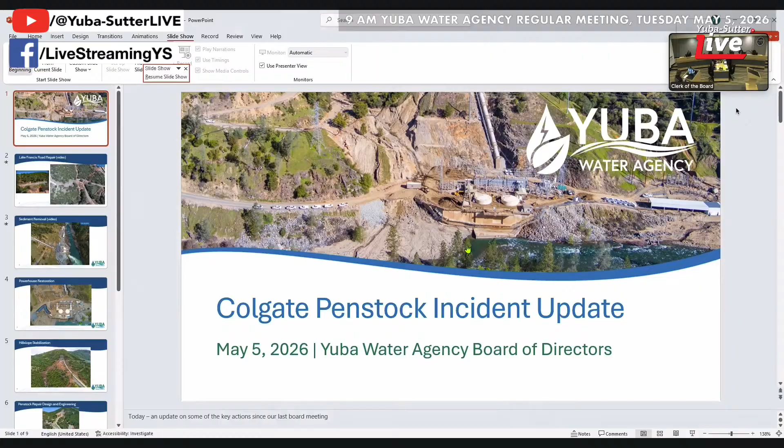My name is Kian Summers. I'm the Director of Power Systems. With me today is Justin Hoffman. Justin's our engineering manager. We're going to give you kind of a tag team update on the situation and the progress we've been making out in the field, and are happy to answer any questions you may have. So with that. Great. Thanks, Kian.

So the first one is the Lake Francis Road repair. This was the first project, as you can imagine, that we started with. We need to get access down to Colgate. So with the incident, we had two kind of rivers that came down the mountain, one on the east, one on the west. The Lake Francis Road was impacted by the west one.

So here you can see the first one. It should be playing the video. Question mark, Mandy? Yeah.

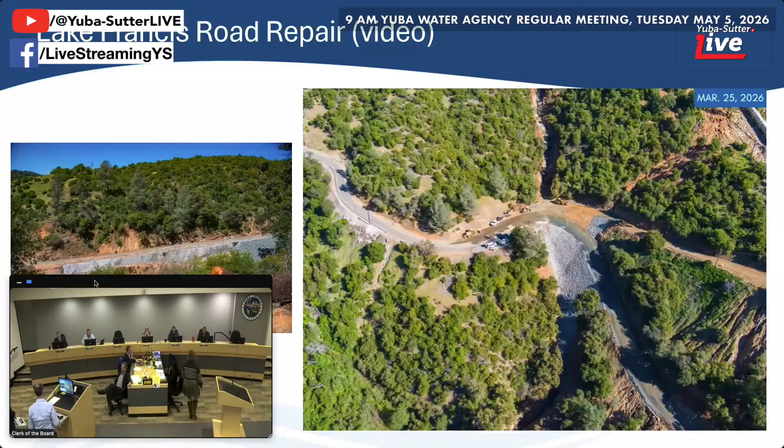So this is a video of progress over time. The first thing, like I mentioned, was to get access down to Colgate. There were two areas or slides that we did rock buttressing on. That got us down to the powerhouse within roughly a week. And from there, we started adding more robust rock buttresses. This is slide 1 here that you can see. So that's been going well. Access continues to improve over time for us to get down there.

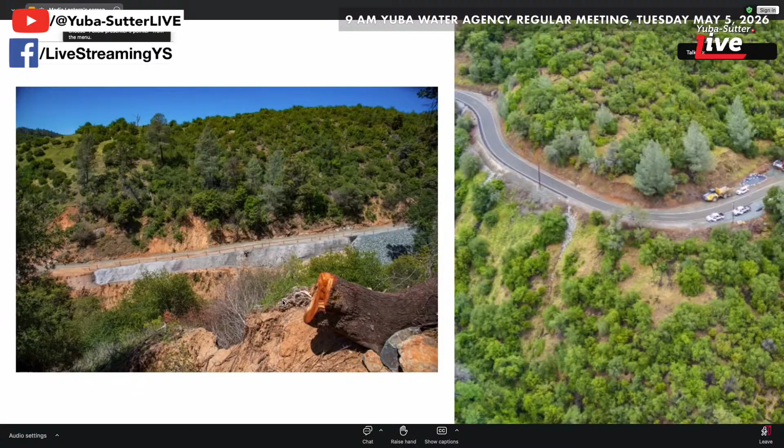One of the big tasks that we're doing is the picture on the left. This is below slide 1, which is also a rock buttress, but below slide 1, we did a soil nail solution. So that's ongoing. We decided to do a rock buttress up of that just because of the area we had. The soil nail was a good solution for downstream because of the rough rock that was upstream. We couldn't cut into the hillside. And then downslope of that was a river channel that we didn't want to fill in with a 1.5 to 1 rock buttress. So we paused. We've been starting with that. That's kind of the progress to date now.

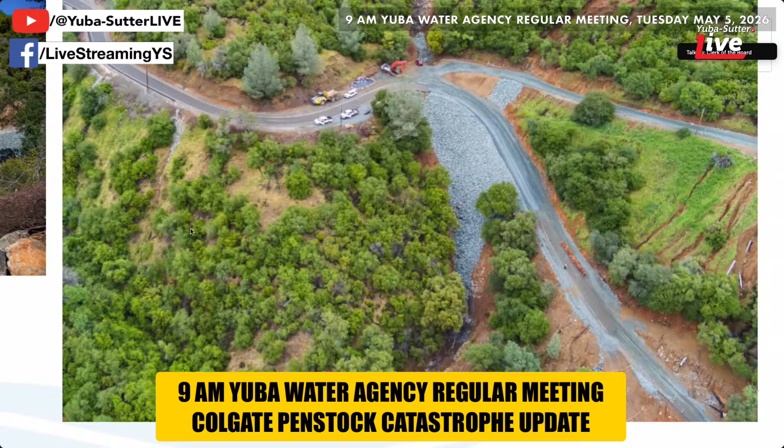As of now, we have the contractor back on site working on the soil nail solution there. That'll continue. It's a very active construction site, as you can imagine, not only on Lake Francis Road, but with all the other recovery efforts that we're doing down there. Just looking ahead, the next milestone is the July timeframe, which will be mostly completed with the core of the road, and we'll go into big culvert replacements and doing some patchwork paving. When we did the initial access, we just kind of placed culverts to get access down there. A lot of them were compromised, and we didn't replace them at that time.

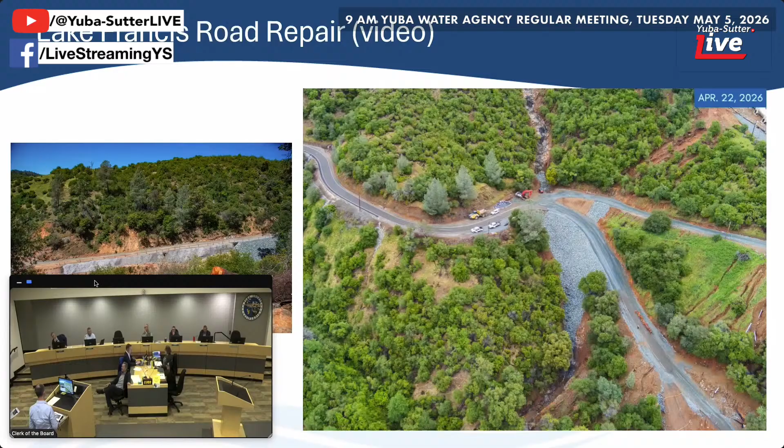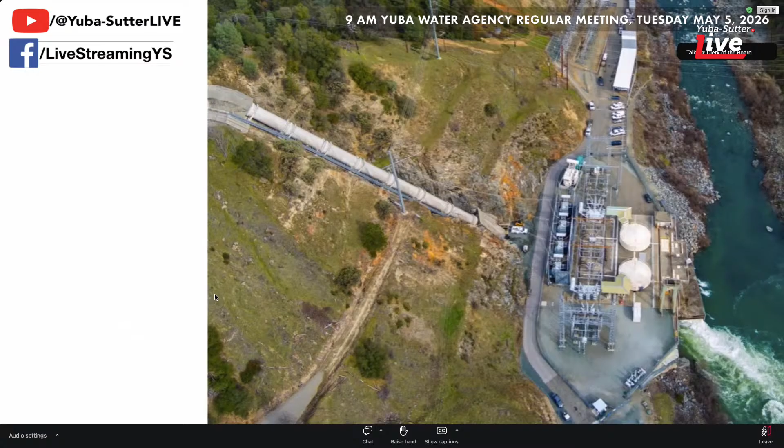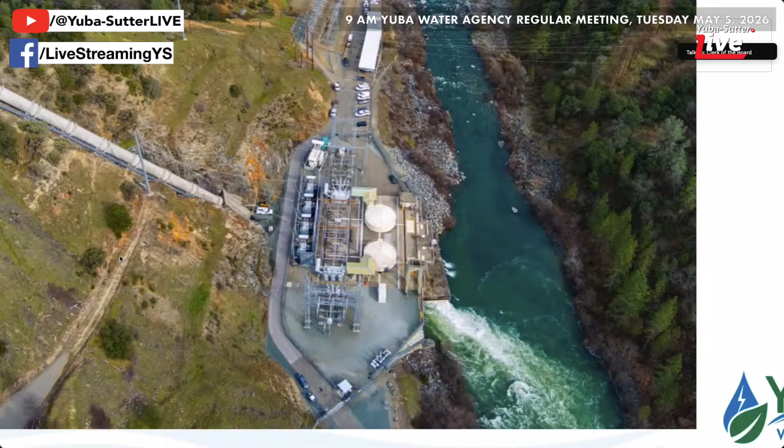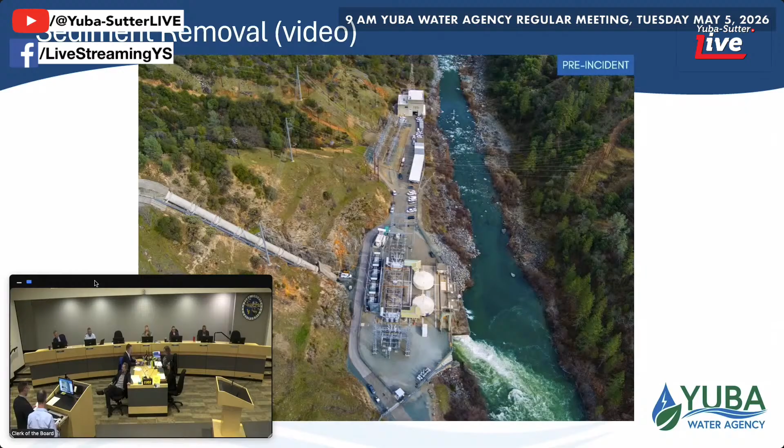All right, so I'm going to talk a little bit about sediment removal. We're making steady progress on the land-based sediment. As a reminder, we have an estimated 70,000 cubic yards of sediment on land and in the river. Just to give you a picture of how much we have down there, we estimate that on the upstream side of the powerhouse proper, there's about 13 feet of sediment in some places. In the western debris fan, there's about 17 feet. And then in the eastern debris fan, there's up to 24 feet of sediment in total. Just to give everyone a reference, we're talking about 70,000 cubic yards of material here. In 2021, we removed about 39,000 cubic yards of sediment from behind our house dam at that time.

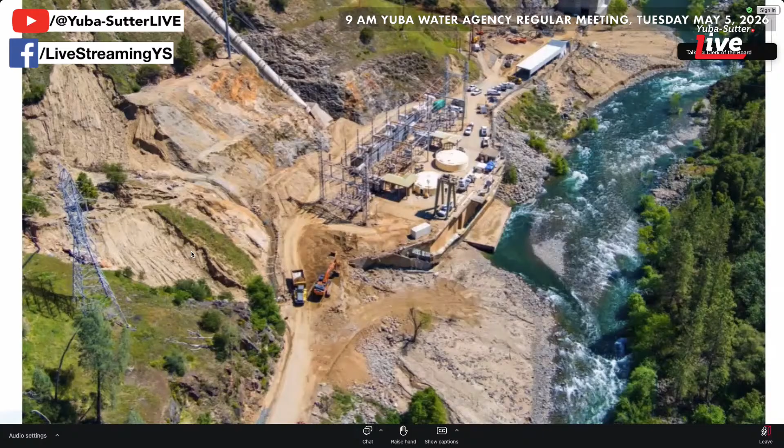And Nordic Industries is doing the work for us down there. I'll go ahead and hit play. So you can see the progress we've made over the last couple of weeks. So shortly after the incident, about a month later, a little later in April, and then here fairly recently, you can see a significant amount of sediment has been pulled off of the site. We've been focused mainly on the area around the powerhouse so we can begin our testing and necessary repairs there. And then on to powerhouse restoration.

As Kian mentioned, the focus was really getting that sediment off the top deck of the powerhouse. That sediment was wicking moisture through it and then through the powerhouse top deck and penetrations and then into the powerhouse. So the focus was to get that back away off the powerhouse.

That allow us to preserve the interior of the powerhouse and then also preserve some of the big assets that we have on the top deck up there. So that's been going really well. We had 24/7 operations as we started to dehumidify and then heat up the inside of the powerhouse to try to preserve some of those big assets.

Since then, and back to that, we were on a standby generator in the top right corner up there, our SEG. Since then, we've restored the 12 kV power from PG&E, and so that has allowed us to cease the 24-hour operation. Drying out, dehumidifying is going very well.

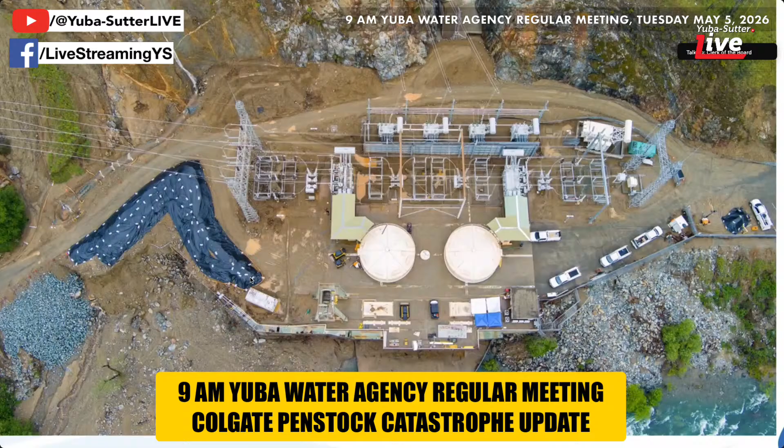We did some initial condition assessment and testing on both of the generators. Both are very good. We have further comprehensive assessment testing that we'll be doing on not only the generators, but the generator step-up transformers, the generator circuit breaker, all of which are super long. All that stuff is going to be planned for around August, September.

The crew, so systems that we've brought back online. So as we dehumidified everything, we started to bring back lighting and stuff. It was our first thing we wanted to do. So we got back circuit by circuit, slowly, methodically progressing through each of those circuits, making sure we don't have any water intrusion in circuit breakers, wiring, etc. So that's going really well.

We brought back battery systems just recently. A lot of the lighting, the heating, ventilation, as we talked about. Compressed air is back online now, and water is back on. So all that's been really good.

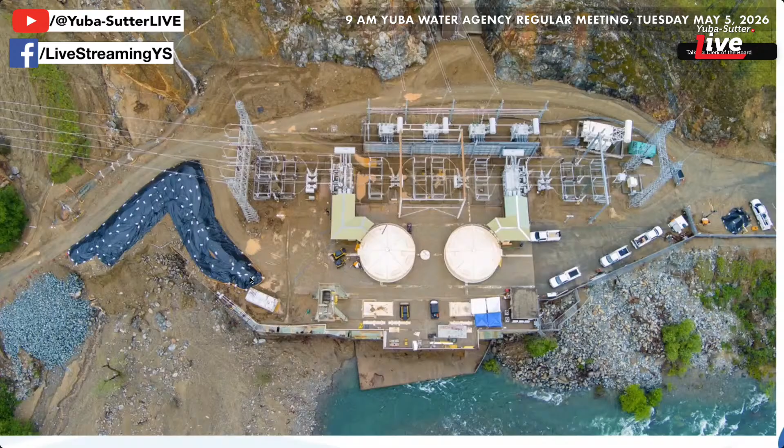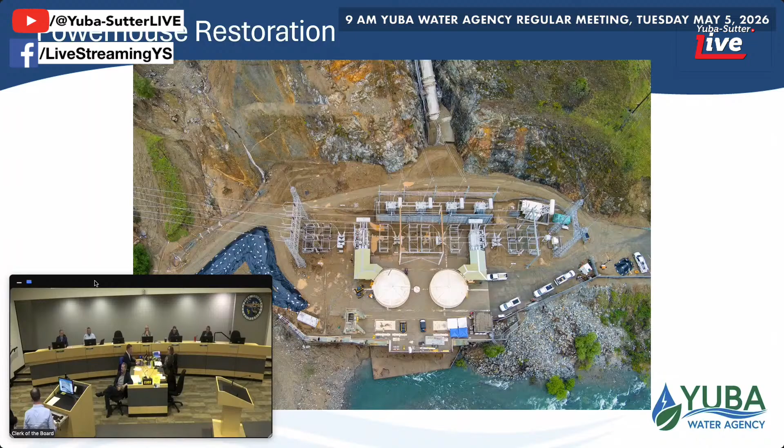One thing, I can't remember what meeting we were in recently, but I think it's a morning meeting. One of our coworkers mentioned that they don't see the progress when they're down there doing stuff every day. And so when we visit, which is a couple times a week, we see these big milestones of changes. And so they mentioned that it's good to hear success and that things are going well. Excellent.

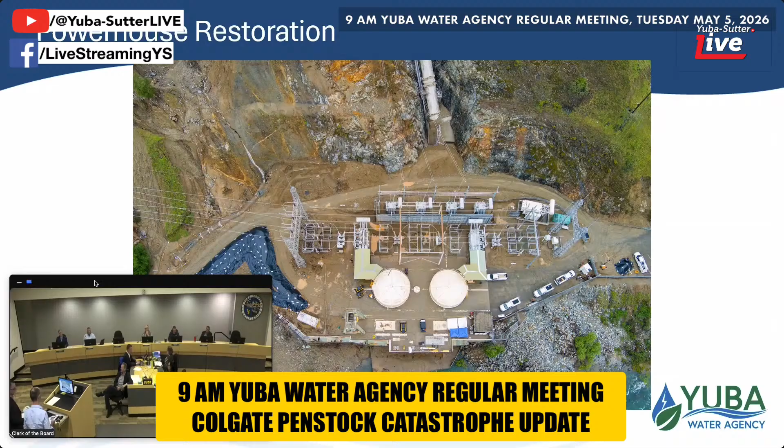So once the road stabilization was pretty well taken care of and we have the powerhouse, the next thing that we focused our attention to was stabilization of land damaged by the water flow. We have about 70 acres of affected land out there. We're doing everything we can to stabilize as much of that area as possible before October of this year, before we get

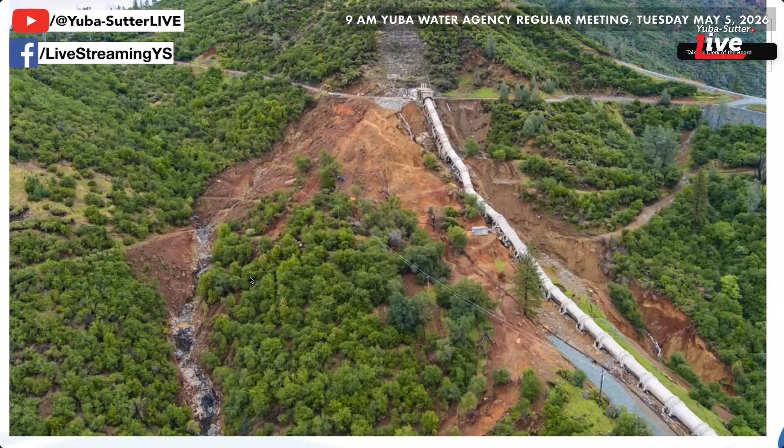KGS, an engineering firm, is developing plans as to the specific treatments that'll need to be taken care of at each location. And then, as of last week, we saw the 30% design for each area. So we're reviewing those right now, trying to figure out what we can accomplish in the next 6 months and what we move to a future date.

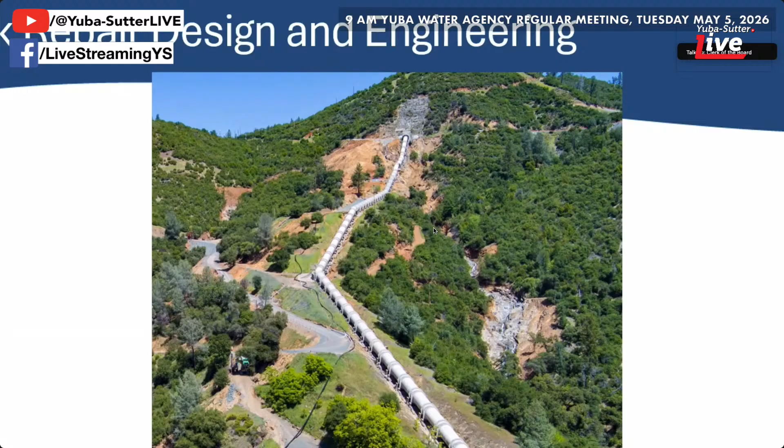So surrounding that, as you can imagine, this is the big engineering design and construction project. We're working with KGS because a lot of this eroded area, as you start laying it back or finding solutions to that, will get really close to the penstock. So both of these projects are working hand in hand. We have a notice of intent to award to an engineering design firm for the redesign of the penstock and associated equipment. The first step in that is to do an assessment, figure out what's out there.

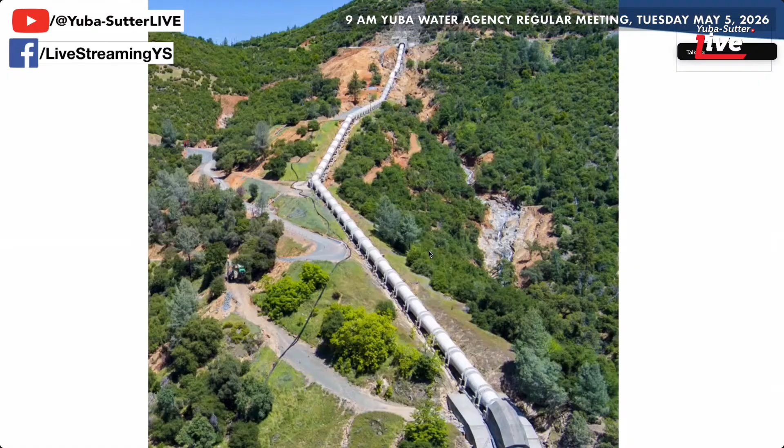Then boots on the ground. We've had a lot of drone imagery, helicopters, et cetera, but we haven't walked a detailed engineering walk through basically the penstock, CPSV area, all the way down to the powerhouse. And that's going to start and end with the report in June. That'll really give us a scope of replacement of that penstock area. So this is just design.

We're expecting to get through 100% design April of '27. That's just a target. Obviously, we need to figure out what we're designing based on cause, but then also the assessment that's out there. As you can imagine, this is just the design and engineering. There's still the cost for

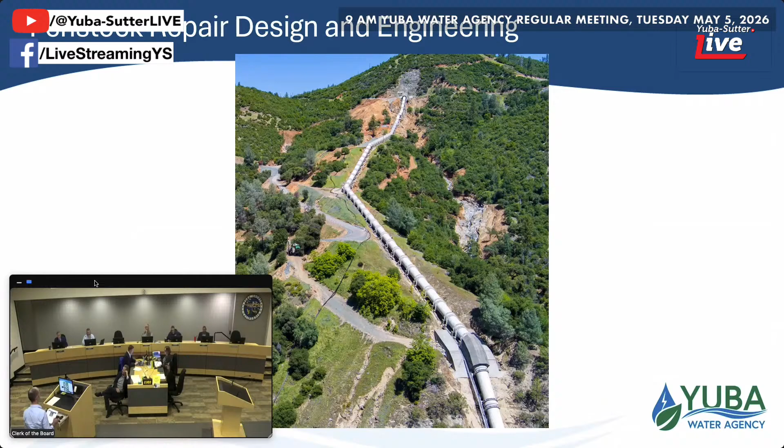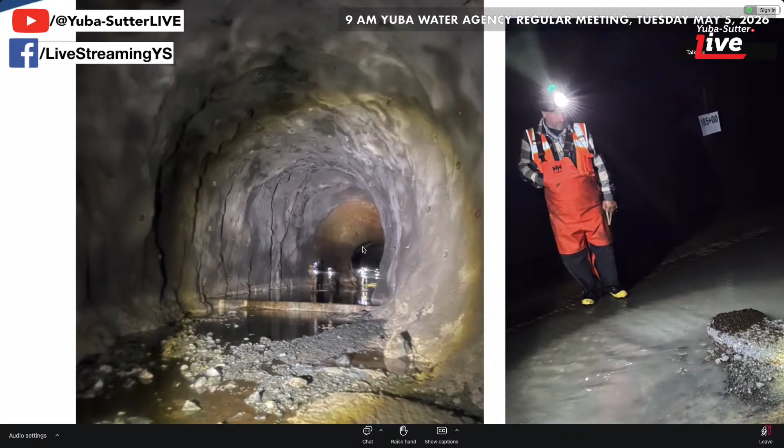Then the tunnel. As you're probably aware, you don't want to dewater tunnels of this nature quickly. It can lead to damage. We're very fortunate. On March 24th, our staff, in addition to some engineers, inspected the entirety of the tunnel. We identified some minor rock plucking in the rock sections, and then some damage to the concrete inverts. But the tunnel's in extremely good condition.

We do have a design contract that we're starting to work through to bring somebody on board to design those concrete repairs. But we don't expect any tunnel repairs to be.

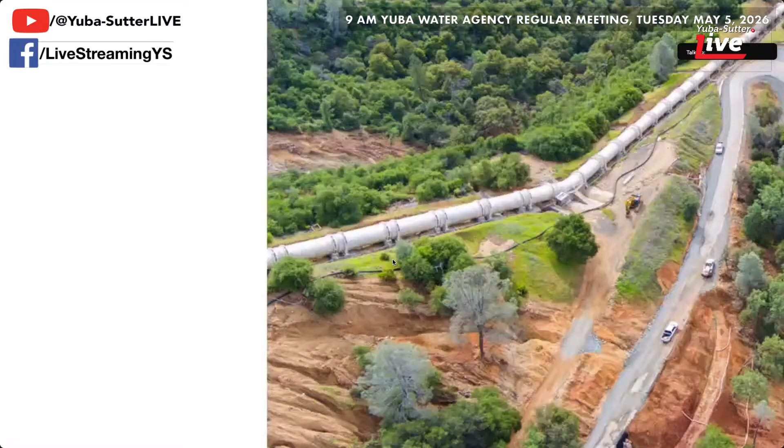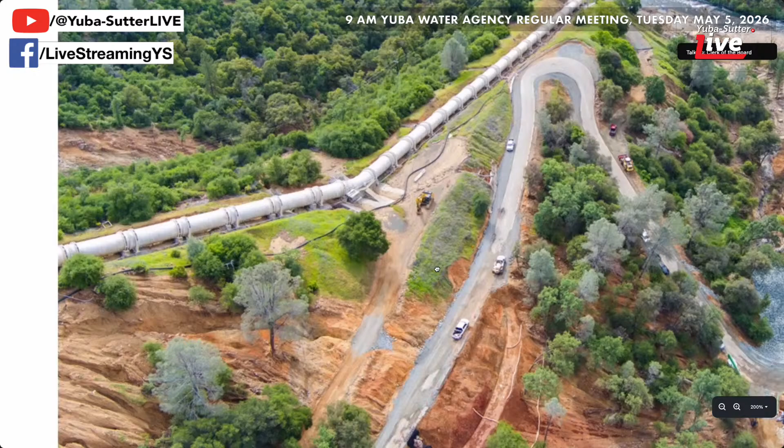And then looking ahead, a couple of bigger milestones. We mentioned a few as we went through these slides. The penstock repair: the first thing is that condition assessment and report. That's going to be targeted for early this summer. We have powerhouse equipment testing, so that's the generators, the generator step-up transformers, and the generator circuit breakers. That's all this summer as well. Preliminary tests are showing good on the generators, so that's a positive.

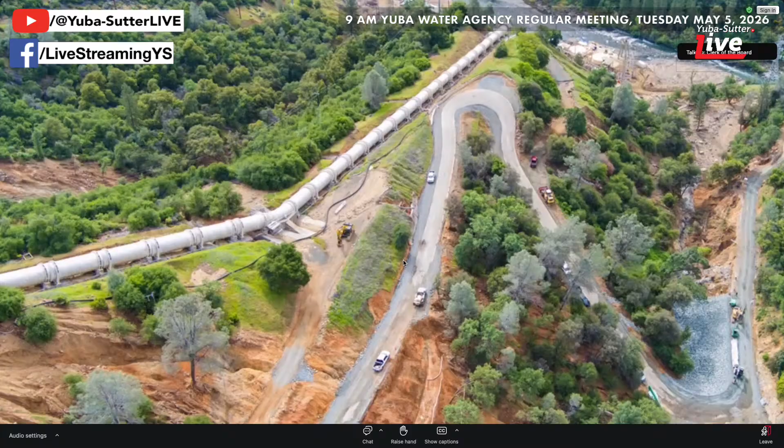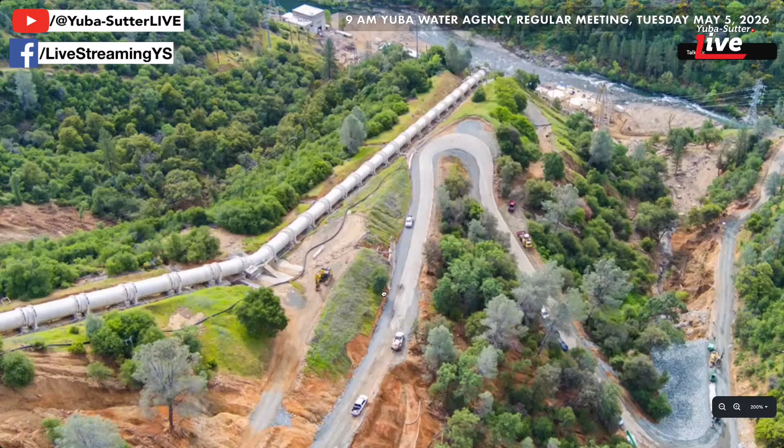We have the sediment removal within the Yuba River proper. That's starting pretty quickly, within a few weeks. We're expecting to be done with that in July. That's just the in-water work. There's still going to be a lot of work associated with disposal sites and stuff like that. And then we'll just be continuing restoring the powerhouse proper.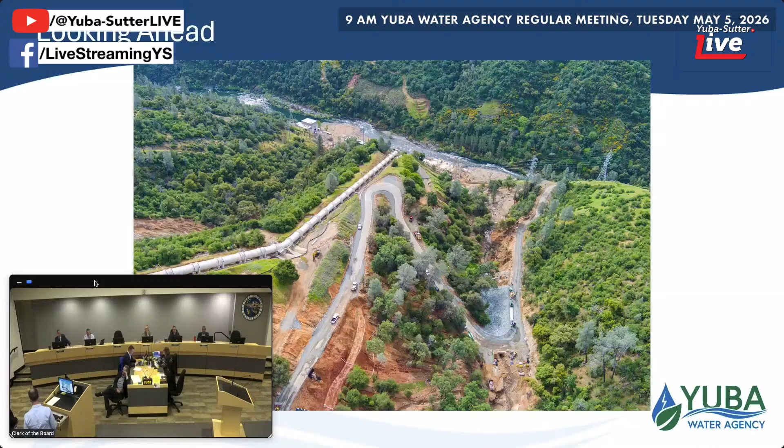So this is our last slide. I want to thank the engineering team and all the other people that have been helping us from February till today. It's only been 3 months. Feels like it's been way longer than that. But there's been a lot of people that have sacrificed time and effort to get to where we are today. Absolutely well said, Justin. And with that, we're happy to take questions. Any questions from the board?

Through the chair. No questions, but thank you for your continued effort on this and appreciate the update. Yeah, through the chair, no question as well. It was a good presentation to show where we're at, and I've been fortunate enough to go down and see it, and I know those guys can't see it as they're doing it because it's happening right in front of them. But maybe we could have some type of milestone calendar to track this for them, so they can see it in real time, and then maybe play it for them when we do one of those lunches we've been talking about. So it'd be great.

Through the chair, no complaints, but please thank everybody. Let them know that we really appreciate their hard work, and good job. I have one question about the PG&E switchyard. Have they given us their timeline at all yet? Do we know much? They have not. Okay. And so the critical path as we know it is just getting the penstock itself figured out and repaired. That's our belief at this time. Yep. Okay. Any questions from the public?

So I want to thank Kian and Justin for the presentation. Like they said, there has been a lot of work going on out there, and on a day-to-day basis, it's tough for the crew to see their progress. But I try to talk to them every week and encourage them that they are making progress. And in fact, you saw that in these photos today. I just wanted to make sure that this board got an update on some of the positives going on out there. We still have a lot of work to do in design and figuring out the root cause and what the total recovery is going to look like. So thanks, Justin and Kian, for that.

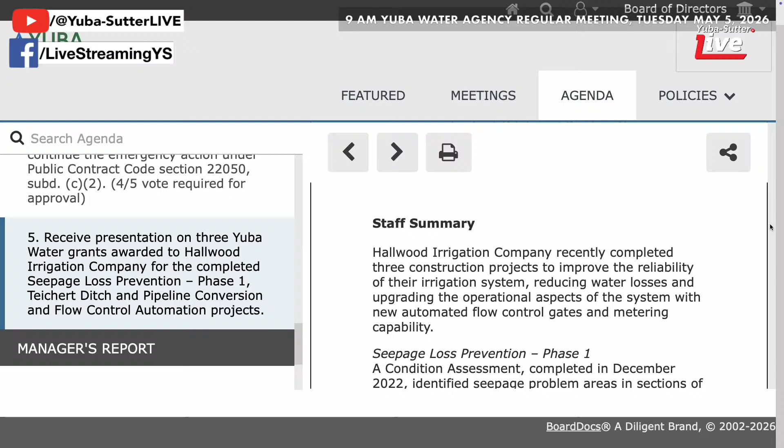Andy, I go from item 4 to item 6. Matthews, yes. No, it's the same. I'm sorry. Item 5, receive presentation on 3 Yuba Water grants awarded to Hallwood Irrigation Company for the completed seepage loss prevention, phase 1, the Teichert ditch, and pipeline conversion and flow control. Fallon.

Morning, Chair Bishop and directors. My name is Fallon Cox, and I'm the Grant Program Manager. I'm here to welcome Mark Chanlis from the Hallwood Irrigation Company and Brian Mueller from Verdantis to give a presentation on 3 recently approved or completed projects.

Morning. My name is Mark Chanlis, and I serve as one of the directors of the Hallwood Irrigation Company. Also in the audience today, we have Steve Springer, our president, and Mike Felice, our vice president of the Hallwood Irrigation Company. Hallwood very recently completed 3 significant water infrastructure projects that will serve the farms and the broader Hallwood community for decades to come.

The combined cost of these projects is approximately $6 million, with construction fully funded through generous grants supported by the Yuba Water Agency and the U.S. Bureau of Reclamation. On behalf of the Hallwood community, I'd like to sincerely thank the Board for its continued support, and I'd also like to commend the Yuba Water Agency staff for the excellent assistance that we've had throughout this process. Realistically, Hallwood wouldn't be able to do any of this work without the support from Yuba Water Agency and the staff. So people of Hallwood, thank you for that. With that, I'm going to introduce Brian Mueller, and he's going to give you a brief overview.

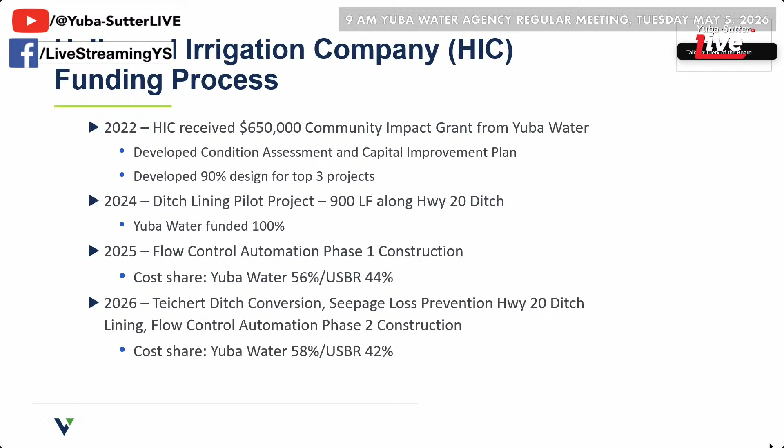There was also funding assistance to perform a pilot ditch lining project of one of their ditch systems on Highway 20 in 2024. Following that, in 2025, they were able to complete a phase 1 flow control automation project on their system. Getting to today's presentation, they were able to just complete 3 critical projects: the Teichert ditch conversion, seepage loss prevention on Highway 20, one of their ditch lining projects, and phase 2 construction of their flow control automation project. In all, Yuba Water funded about 58% of the costs, and they were able to secure federal grant money from the USBR that offset that by about 42%.

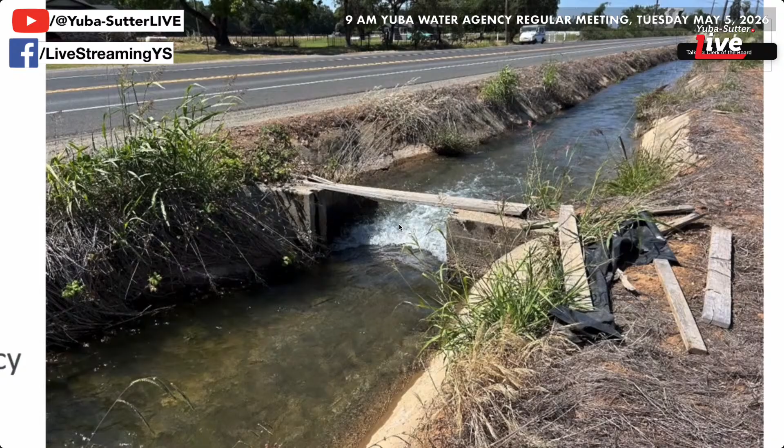Getting into the 3 projects that were just completed, starting with the Highway 20 ditch lining project. This essentially replaced the existing ditch. Some of it was lined with concrete, some of it not, but it was about 3,600 linear feet of ditch that was lined with a geomembrane liner and then covered with about 3 inches of shotcrete. We put this out to bid. Escheman Construction was the low bidder for this project. They did an excellent job. As far as funding, Yuba Water contributed about $858,000. The USBR grant was about $614,000.

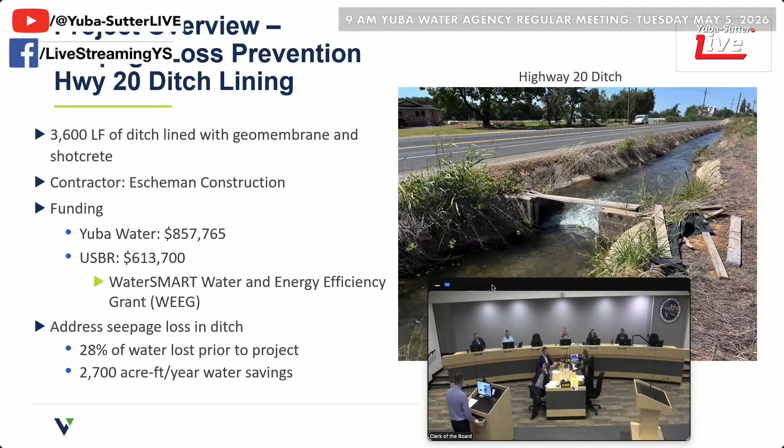The primary purpose of this project was to address a lot of losses as water flowed through this ditch. The liner was extremely cracked and a lot of seepage was happening. In previous years, we did some estimates and some flow monitoring. We estimated about 28% of the water that entered this was lost, equating to about 2,700 acre feet of water savings per year.

So there was reshaping of the ditch. In the photo on the left, you can see an anchor trench. In the middle picture is the geomembrane liner that's being installed and fused together, and that is covered up on both sides with this anchor trench to stabilize it. And the picture on the right is the application of the 3-inch thick shotcrete liner.

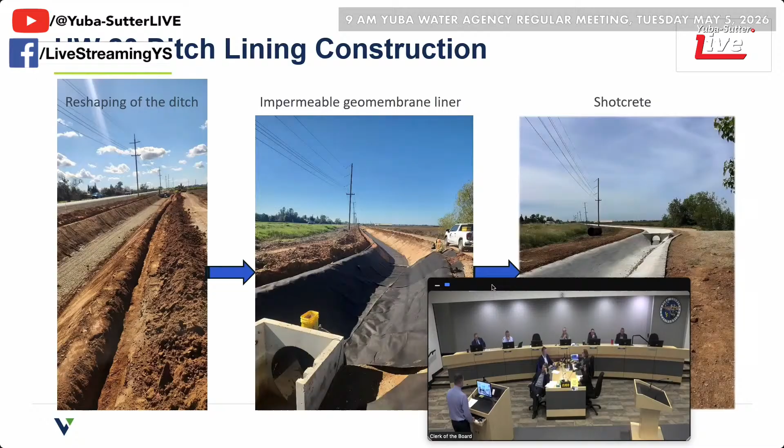Moving to the second project, this was the larger of the 3. This is the Teichert ditch conversion. The Teichert ditch previously went through Teichert's mining facility in Hallwood, traversing through there. It was really 2 different sections, and right where Teichert's facility is, there's a 36-inch culvert underneath. So this project was selected to replace the ditch instead of lining it, with a large diameter HDPE pipeline.

Construction involved 2 different sections, about 7,800 linear feet total of 42-inch pipe. It also involved about 4 concrete structures for both inlet and outlet structures for the 2 segments. Mozingo Construction was the contractor, and again, they did an excellent job completing this project under budget and ahead of schedule.

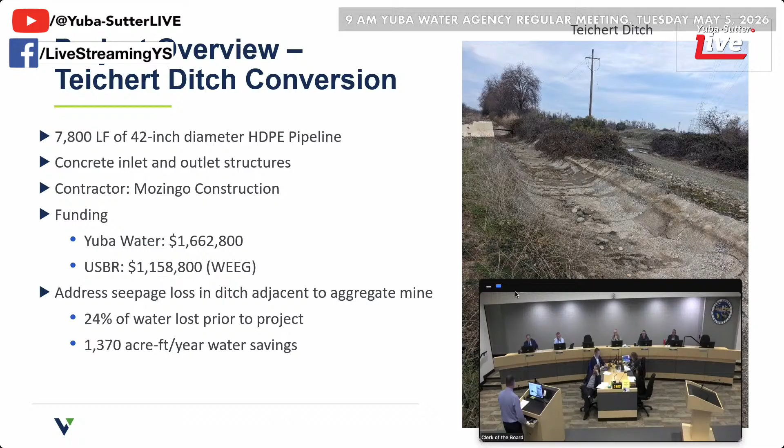Yuba Water funded about $1.6 million for this project, and a USBR grant was received for about $1.15 million. The primary purpose was to address the losses occurring in the ditch through this aggregate mining facility. 24% of the water was lost prior to the project, so that's been remedied. Overall it achieved a savings of almost 1,400 acre feet per year.

I think this was a perfect project for HDPE pipe. It had pretty much wide open space to fuse the pipe. The picture on the left is the fusing machine with the pipe there. The pipe came in about 50-foot long sticks, fused together with these machines. They essentially dig the trench within the existing ditch alignment, fuse the pipe together in long segments, and then drag it into the ditch and backfill it.

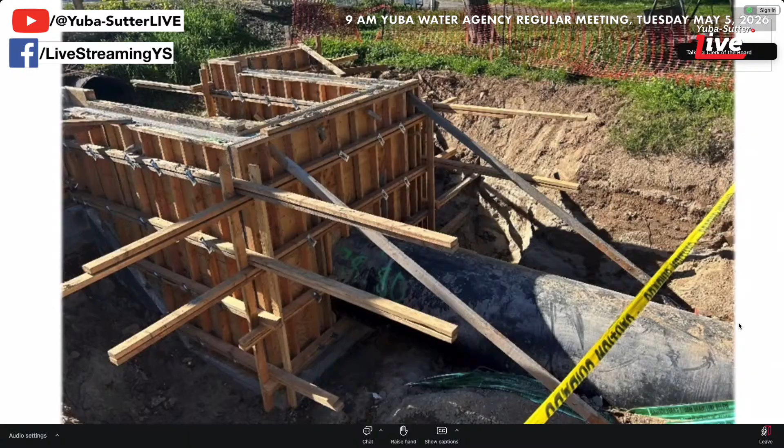That conveys those pictures there. I mentioned the inlet and outlet structures - these are an example of the farthest downstream outlet structure being formed up. You see the pipe entering the outlet structure, and the picture on the right is the completed project. This is at the far downstream end, showing water exiting the pipe below, pushing up through the grates, and following the path down to the existing ditch downstream.

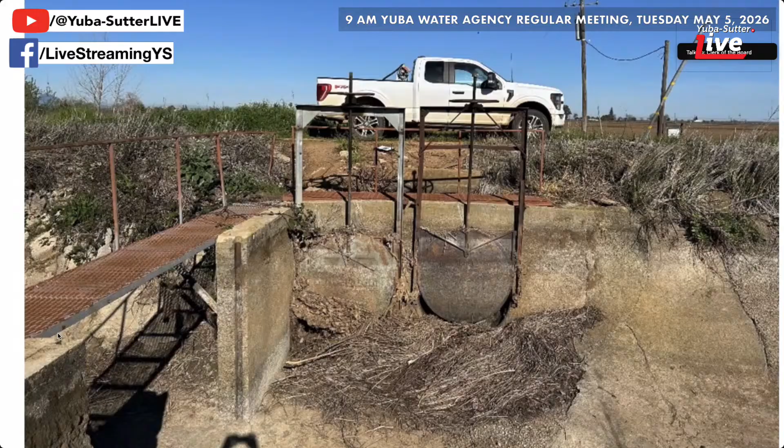The third project is the second phase of the flow control automation. This project replaced about 8 gates across 5 of their diversions. The main part was replacing some old sluice gates and old check structures with flashboards, with new automated gates and a flume gate system.

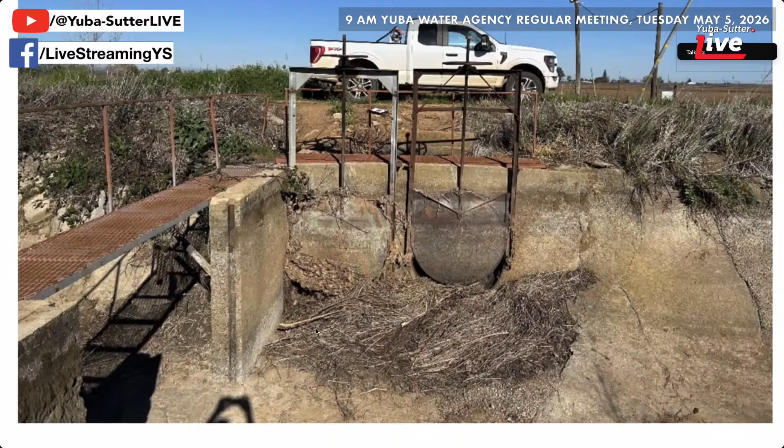Hallwood pre-purchased the equipment from Rubicon Water. It consists of both slip meters and flume gates. They also hired Laurel Ag and Water to install the gates and prepare the ditch for them. Funding was provided by Yuba Water, $560,000, and a USBR grant of about $442,000.

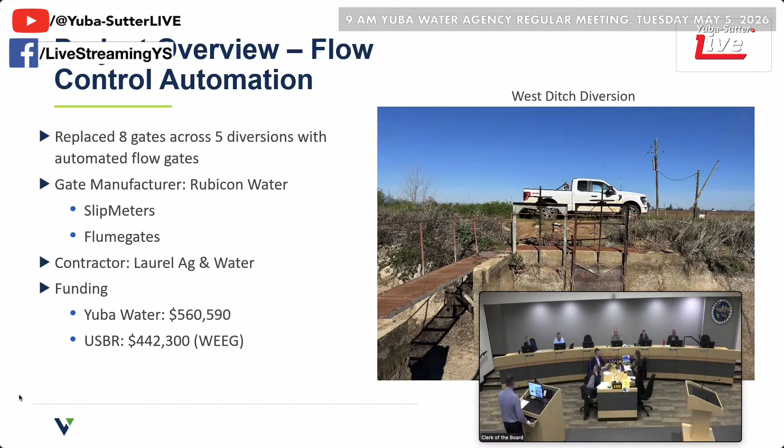This is pretty much the completed project here, at various sites. The west ditch here in the middle shows an example of the flume gate, with new concrete head walls and check structures installed with it. On the right side are the 2 slip meters - these are the diversions off of the main ditch into various diversions.

The west ditch, Highway 20 diversion, and Handy ditch head were pretty similar type projects. The picture on the right is the Baldwin ditch diversion, which was just a flume gate installed with a new concrete structure and catwalks. These are all automated, so you can see they have solar panels for power.

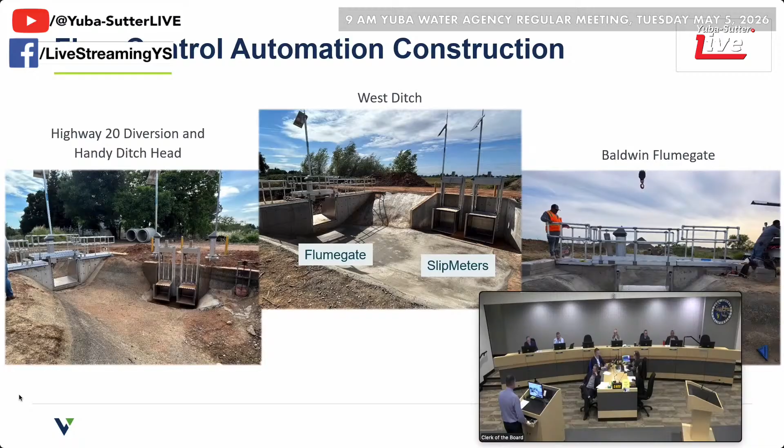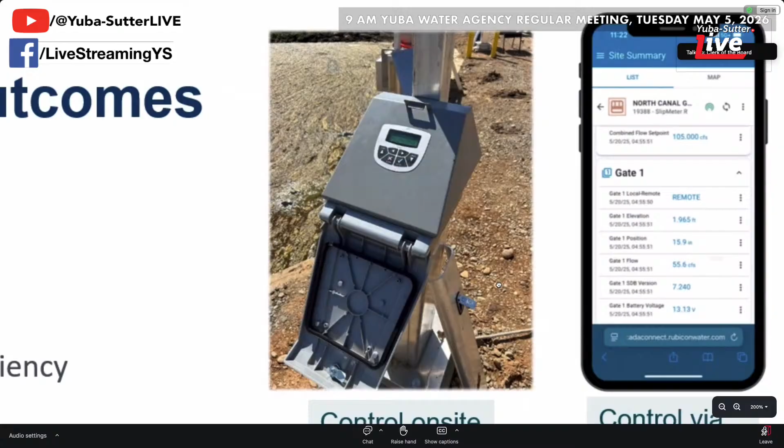Instead of cranking a wheel, operators are able to control these either on site, as shown in the picture on the left, or from their cell phone or tablet. These projects really help improve the flexibility in how they operate and control the system, giving them remote monitoring and control alarms. It also saves water through increased efficiency and a better handle on their flows through the irrigation system, and helps with collaboration with neighboring districts.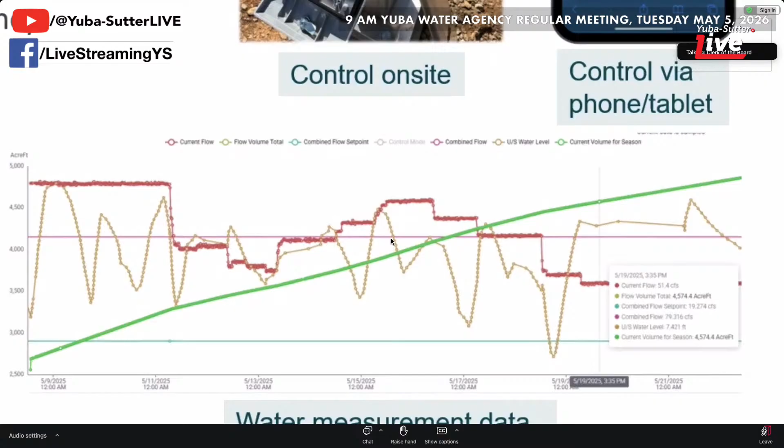Part of the canal system they share with Cordua, so they have some view-only capabilities between the 2 systems to allow them to coordinate on flows and diversions. And finally, better flow measurement and data collection lets them better anticipate future water demands, now that they have historical trends.

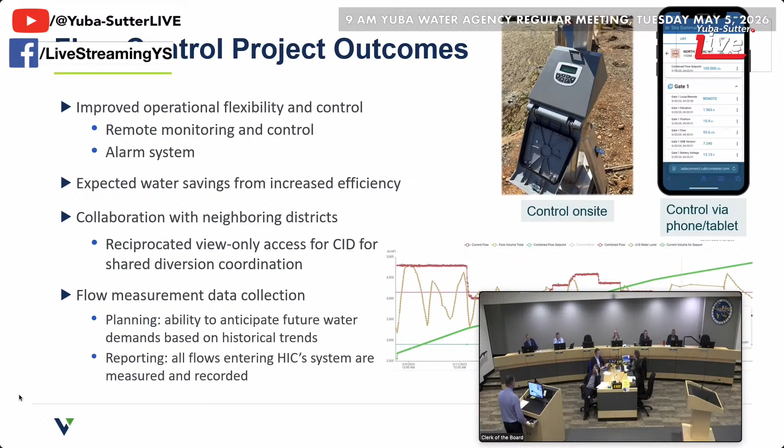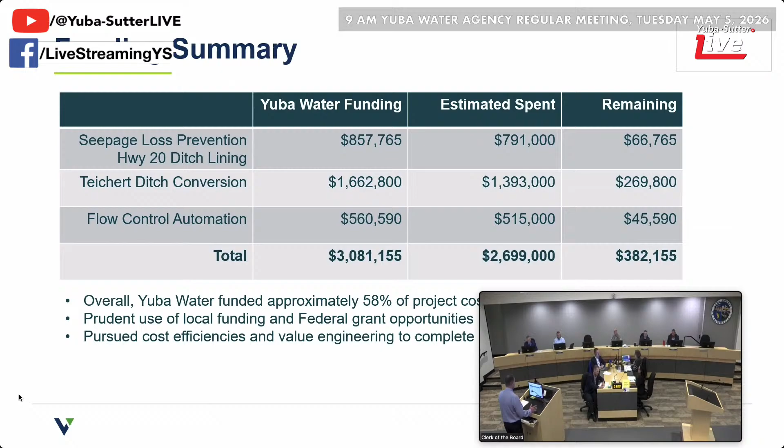Throughout construction we did a good job looking at cost efficiencies. We did some value engineering, especially on the Teichert pipeline, to reduce costs and come in under budget, allowing us to turn approximately $380,000 from these projects back to the residents of Yuba County.

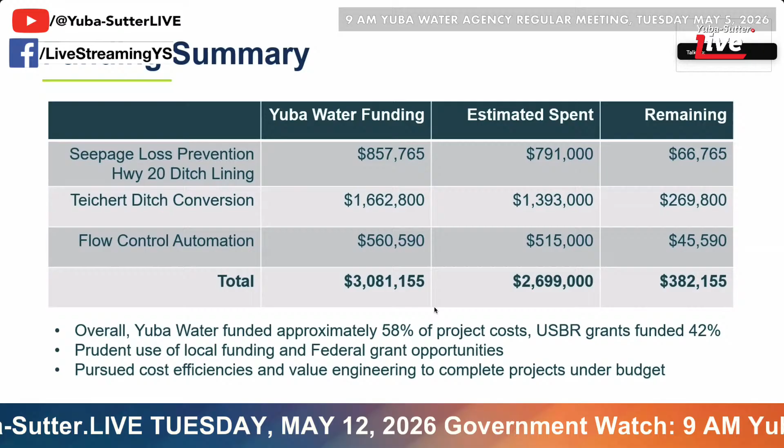That is my presentation. Any questions or comments?

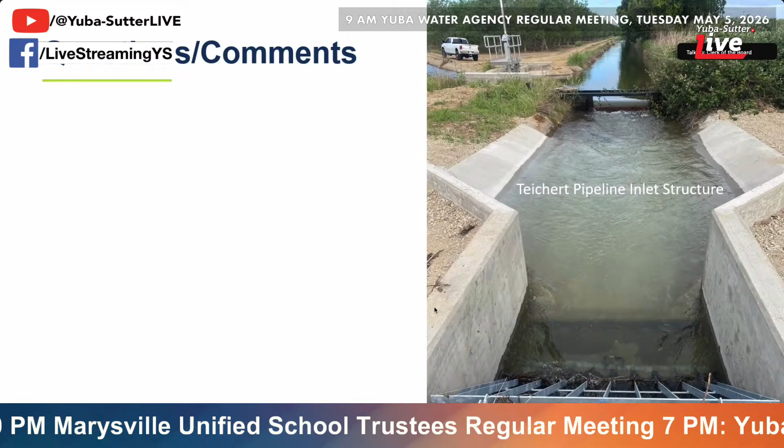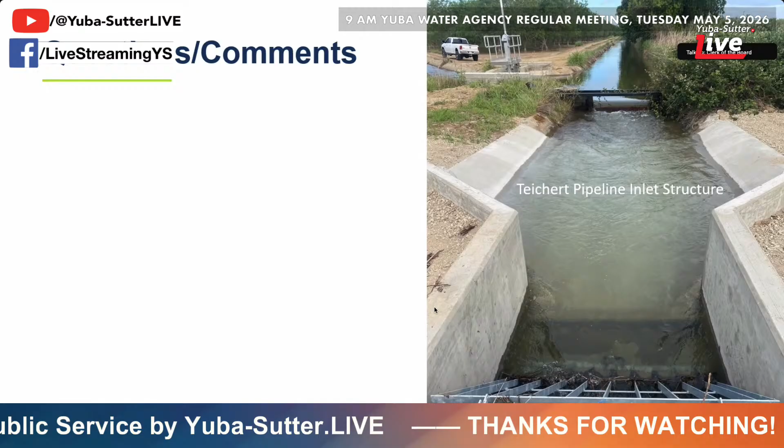I have a question through the chair. I did the math in my head on the ditches, but how about the pipeline? How much is that per foot, putting the pipe in? The construction contract is about 2.4 to 2.5 million divided by 7,800 feet, so maybe about $400 to $500 a foot.

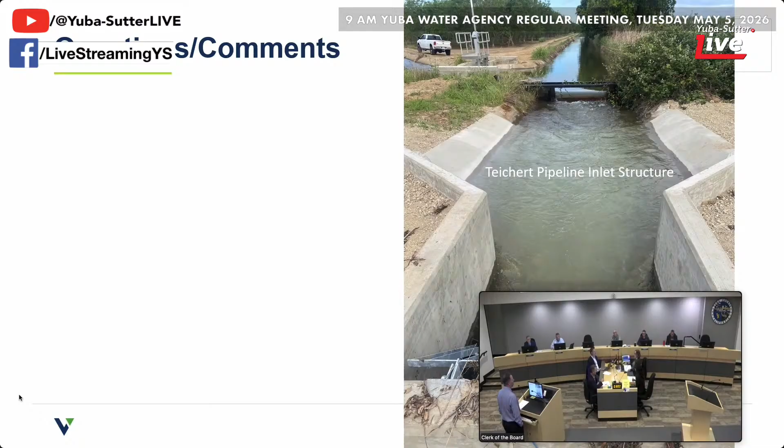That's kind of what I came up with on the Highway 20 concrete ditch, so it's about the same price. Yeah, I think it's actually a little bit less for the pipe, probably just more economy of scale, since the Teichert pipeline is a larger project.

Well, my other comment is thank Mark and Mike and Steve for getting these projects done. I know it's been a long time coming, so appreciate you guys. And you too.

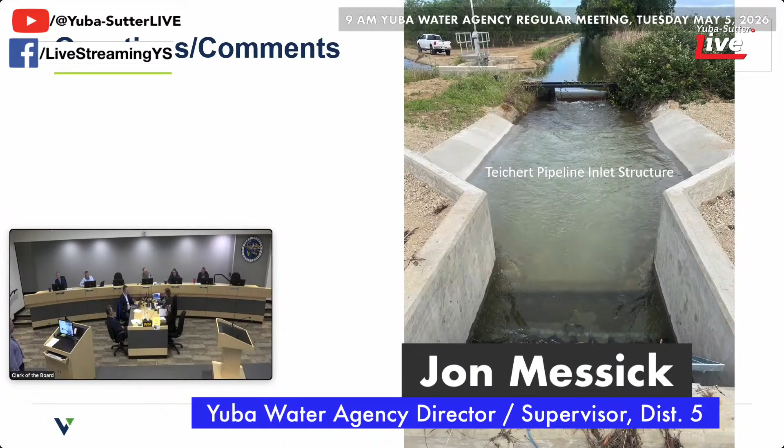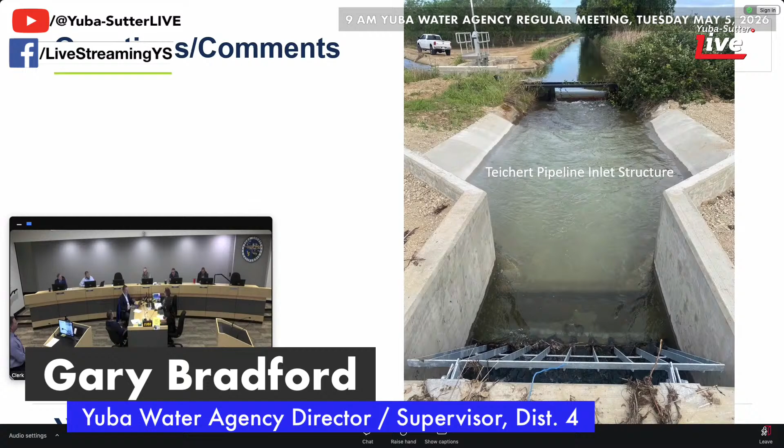Gary, through the chair, just want to thank you for giving this presentation and an update to really see what an impact those funds can have. It was just an outstanding presentation. I love seeing the before and after. It really shows us the necessity of the project and the value of the project. So thanks.

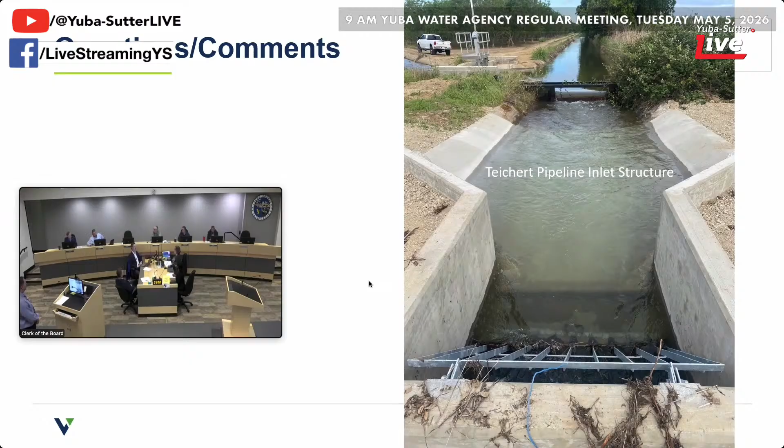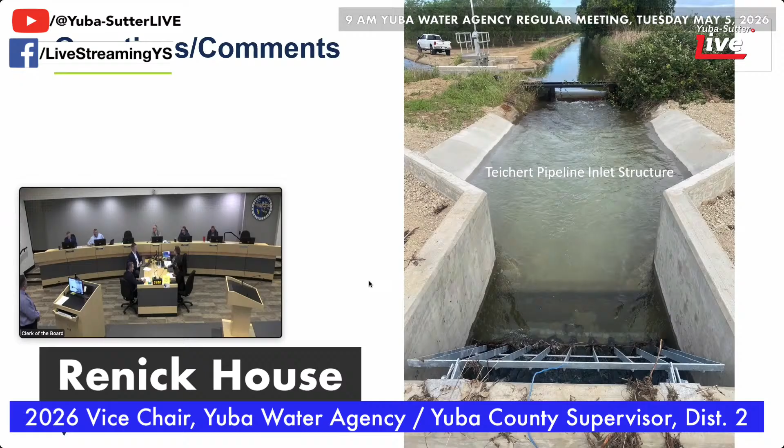I want to applaud the ability of putting in some tracking measures so you can see how much water's flowing through, and with the automatic gate system, I'm sure that was something you had to pay for additionally. I think that's a good thing, because we're always being asked to be good stewards of the water and show it, and we have to have the data. It'll help us fight the rest of the state for our water at some point. So thank you.

Through the chair, I'd like to thank you for the presentation. Are you going to show this out at Hallwood, to maybe a lot of the people out there? I'm sure they all have questions. You disrupted their water for a little while, but I thought this was very interesting, very active. It's just people don't sleep through this, they actually pay attention.

Thank you, thanks Andy. I'm really excited about saving 4,000 acre feet of water a year, and the timing to get that. Hopefully that's another 4,000 acre feet we can deliver somewhere else this year when delivery is going to be challenging. So the timing is wonderful.

My other comment is that I hope we don't stop planning more projects, because it's my hope, and I think I can probably speak for the whole board, that we will get back to a point where we can help fund some of these projects. We don't know how long that's going to be, but let's keep thinking about where we can save the next 4,000 acre feet of water. That's just an incredible thing to me.

It's the truth that comes through.